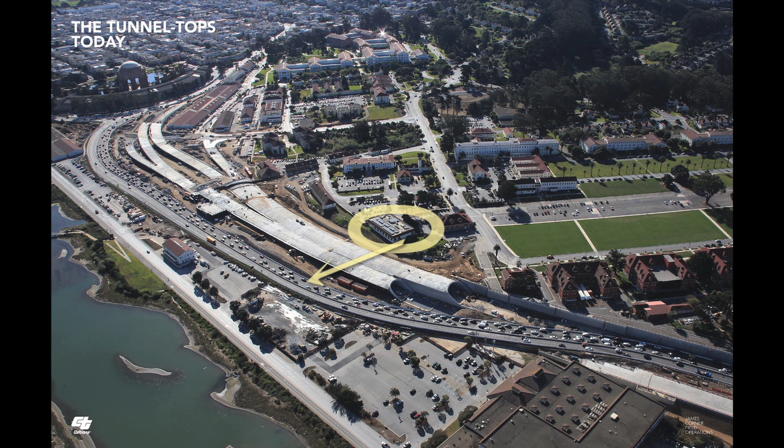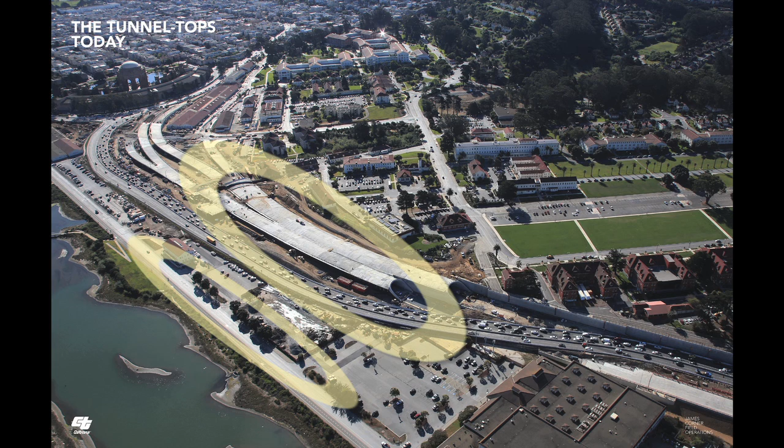This is the project, as you know, the tunnels are being built. This is the main parade and the main post. The building we're in right now is here, with these windows looking out across the tunnel tops to the bay, across the marsh. Our project is about building all of this out as one new elevated park with great views, and a new lower level park tied to the Crissy Field Center with Mason Street as a lower level learning landscape.

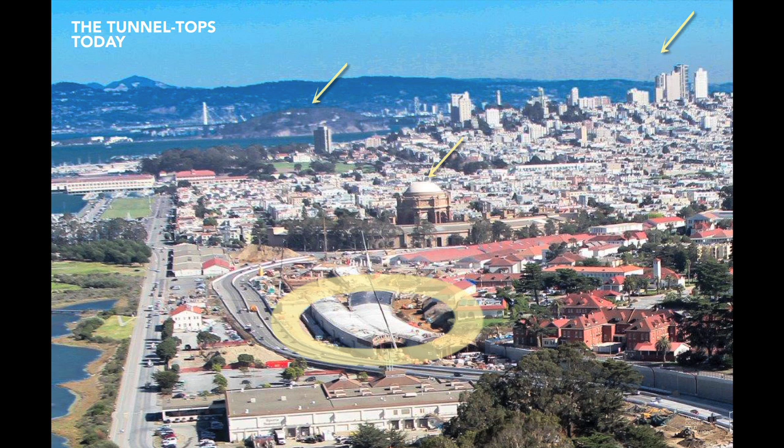This is another view showing those tunnels with the main post, and we will be building out over those tunnels. You can begin to imagine the sort of views you'll get standing 35 feet above grade in this location - clear views to the city, the Palace of Fine Arts, Alcatraz, the Bay, the Golden Gate Bridge, and all the way back into the Presidio, views which we haven't hitherto had.

You could say this is just another park project, and there are lots of parks around the country being designed and built, but I actually think this is a very significant national, if not international, project, simply because of its location. When you get out onto the tunnel tops, this is really the center of San Francisco's psyche, if you will. You're in the context of the bay, you'll see the city skyline, you'll look back into all of the Presidio land, across the marsh and across the field to the Golden Gate Bridge, out to the Pacific Ocean, across to the bay and Marin and Angel Island and Alcatraz. So anybody who understands San Francisco's geographical psyche, its mental map of itself, this is the location to come.

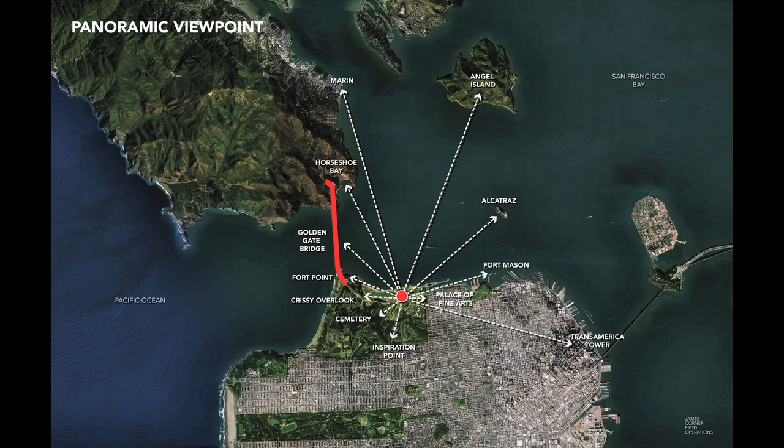I think it will be hugely significant and deserving of the status of a national park. When you step out onto the tunnel tops, you'll have an amazing experience - a very simple but very powerful, visceral experience of being out in the space of the sky, the space of the bay, enjoying all of these views. And of course this is a place not only of great experience and geographical reflection, but also historical reflection, honoring all of the history and the service that has been borne in this place. We've spoken a lot in previous meetings, as well as today with Greg's talk, about the importance of natural systems, natural resources, ecology, and the environment.

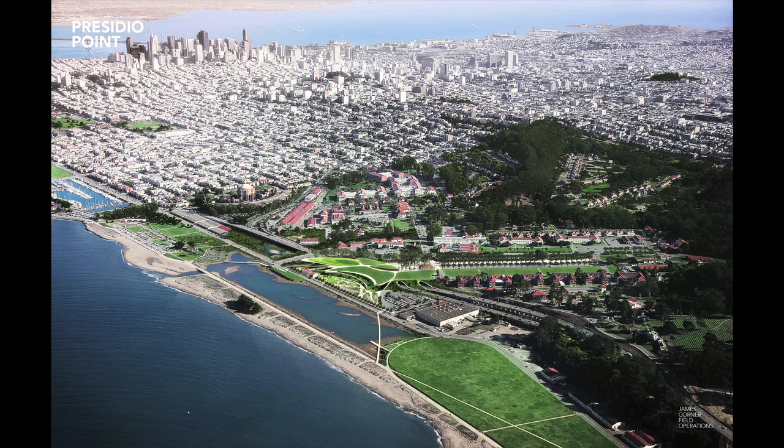Last year, when we won the design competition to move ahead, you can see in this image the idea of Presidio Point - a new landscape over the tunnel tops, taking in these views and enjoying this context. This was the site plan at that time, with a series of new viewing promontories, viewing overlooks, and a variety of public spaces. Over the past few months - January, February, March, all the way through May - we've been engaged in a significant amount of public outreach and public participation.

As a result of that, we developed three alternative variations on a theme. These different variations offered different ideas to do with landscape character, either wilder character or more manicured character, to do with programming and use, from very low intensity uses to higher intensity uses, to different types of landscape look and feel, and the accordance of priority to different moves.

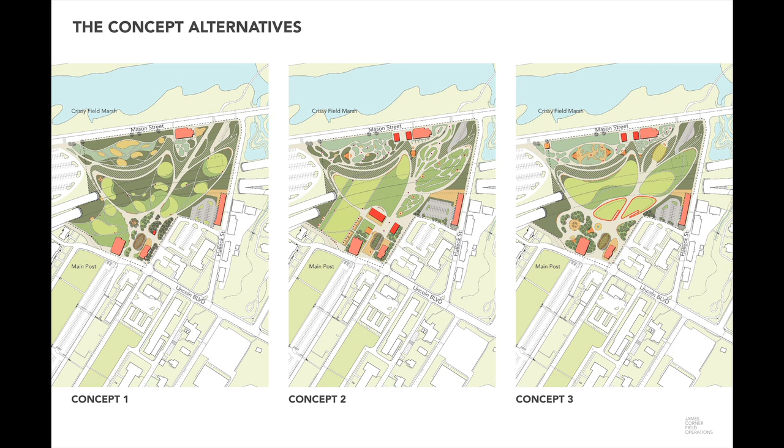These have been on exhibit in the design lab and circulated around the city for several weeks, and we've received an awful lot of input on all three variations, and that's allowed us to get to the point that we are at today. And doubtless this design too will continue to evolve and become richer as the process ensues.

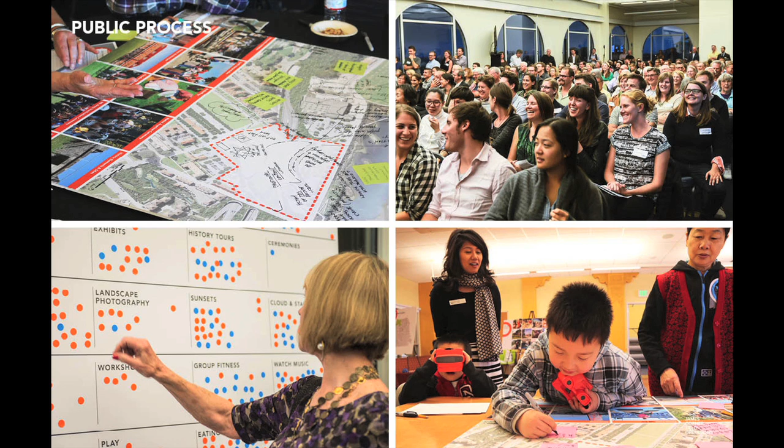I think all of the public outreach we've received have just reiterated the significance and the value of these same goals: honor the significance of the Presidio, offer a magnificent experience of the Golden Gate and the Bay, be welcoming to all, integrate the natural landscape of Crissy Field and the cultural landscape of the main post, create the best place to begin your Presidio experience, and provide exceptional environmental learning opportunities.

I think we would add that we've heard three other things quite loud and clear. Number one, keep it simple, open, and flexible. Celebrate the views and the authenticity of this place, and avoid overbuilding, clutter, and too much stuff.

So here is the concept design as it stands today. And before I delve into it, I want to show you the same aerial photograph today. So here you are actually looking at the parade ground, the building that we're in today with this window here, the tunnel tops, Doyle Drive, the Crissy Field Center, and the marsh.

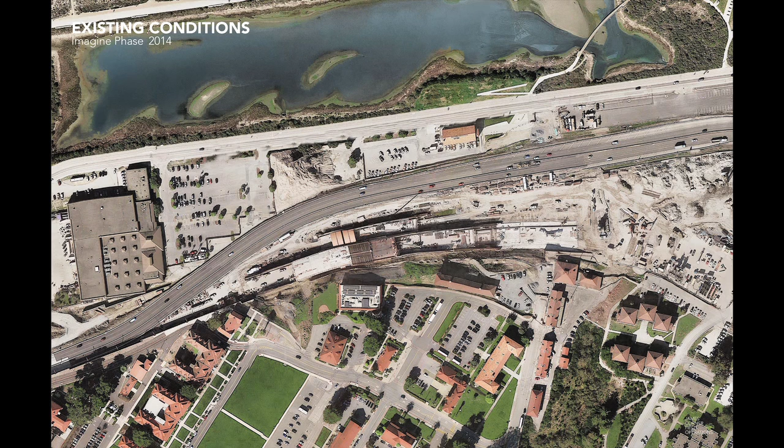And this is the build-out of that park. So this is a hugely transformative project. And when you add into that image what's happening here too, with the Tennessee Hollow project and the Quartermaster's Reach—look at that—so all of this new marshland and creekland tying into the marsh alongside the new Presidio Parklands. This is a hugely significant transformation.

And then what we're looking at here are basically a number of zones through the park. At the beginning, in this more central zone, we have the transit center here, the existing stand of Monterey cypress trees, which we're turning into a new centerpiece as part of a new public space here, removing the vehicular street and the parking. So this now becomes a public piazza, if you will.

We call it the Zócalo, which is a Spanish word for the center of a community. The existing trees become the sort of centerpiece. This building is being renovated as part of a new visitor center. The idea of this is that this is the place where people arrive, are oriented, and gather and assemble.

We're proposing in this scheme the retention of this building, and you'll see some options which have to do with either its removal or its rebuilding. But in this scheme, you see what it would be like if we actually retained this building with the visitor center and the transit center and made something of the central Zócalo.

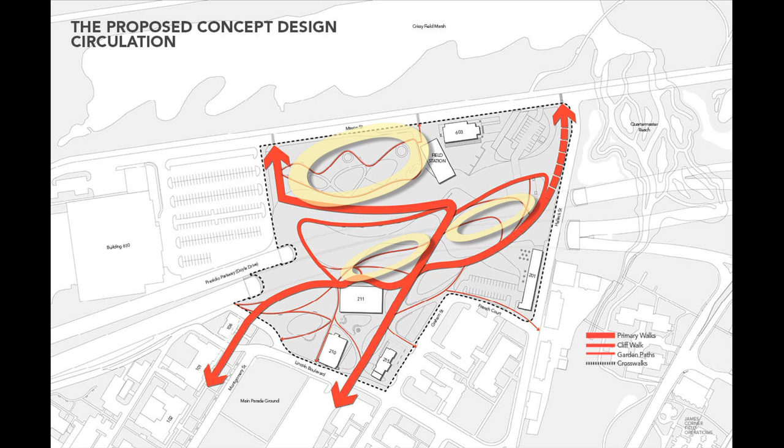And then we still have the cliff walk, which is the walk along the top of the bluff, connecting all of the various overlooks, and a series of tertiary paths. These are quite narrow paths that just meander through the various gardens in this landscape.

And what we have then are a series of different types of landscape. In this color, you see the garden plantings, which would be a variety of succulents and grasses. In lime, you see the lawn areas. This one is actually scooped out of a hill form in an effort to create a wind-protected hollow.

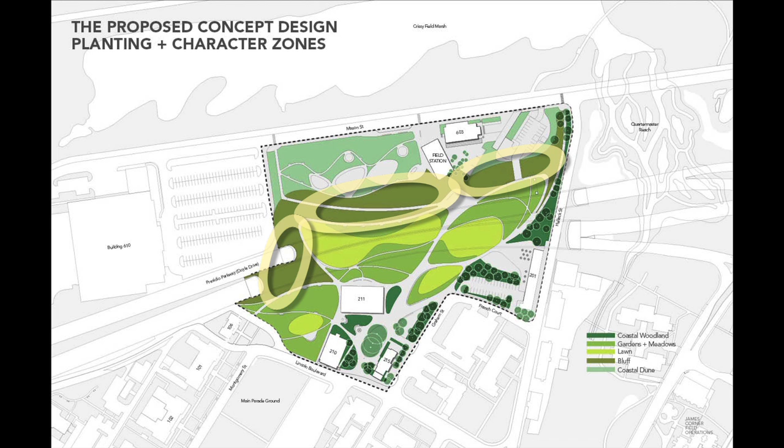Which is oriented towards Alcatraz and the view towards Alcatraz. There's another wind-protected space here, which is looking to the Golden Gate Bridge. And then this is coastal bluff planting, a large-scale restoration project to bring a coastal bluff landscape to the escarpment. This lower level has a series of coastal dune landscapes.

So you see the upper level landscapes, the upper level gardens will be colorful and textural and varied and have very interesting and stimulating horticultural themes. The coastal bluff will have many of the characteristics of the coastal bluff landscape around the Presidio. Some coastal woodland down in the lower landscape, but mostly coastal dunes.

Drawing across that natural feeling from the marsh and the bay. This is what we call the concept design, but then we have actually a sort of catalog of components that we're considering as potential additions.

And these are things that in the next few weeks and months we need to study further and explore, and also run through you as part of the public process about what things resonate and what things maybe don't resonate so much.

In this sort of catalog of additional elements, we have significant new furnishing around the Zocalo, a new meeting and gathering space, a new building to replace this building, increased seating and gathering spaces in the gardens and around the lawn area, various modifications to the overlooks that dramatize them, especially the western overlook with the cantilevered walk.

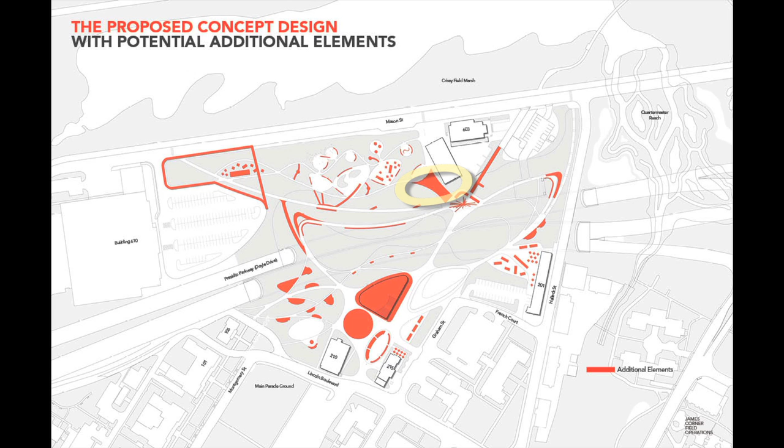A number of additional stairs and ramps and ways to get down to the lower landscape level, including an amphitheater here, or actually less an amphitheater, more a series of seating terraces that bring you down from the central overlook, and a variety of other amenities.

And that produces this version of the plan. If this was to be the full build-out with that panoply of components, this is the plan that shows the concept plan with all of the potential additional elements added.

This is a view of this place today. The main post is here. This is the parade ground in Crissy Field, Crissy Marsh, and the site that we're looking at. And this is it tomorrow,

Including the new work at Quartermaster's Reach. So today, a lot of concrete, a lot of noise from vehicles, a lot of disconnection. And tomorrow, a new democratic platform floating out into the space of the bay, significantly greener and significantly more interconnected with the adjacent resources of the park.

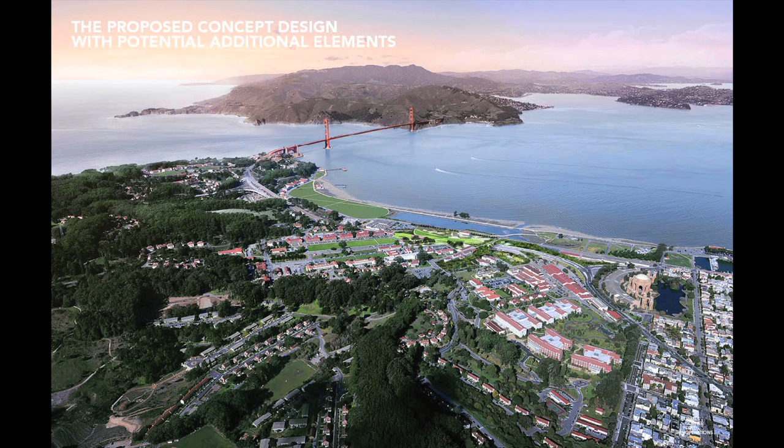This is a view of the site today, and then the project tomorrow. The new visitor center, the shaped cliff walk with the new bluff face, and the lower level learning landscape, an expanded Crissy Field Center.

So again, from a landscape of fragmentation and a concrete jungle to something that is green and interconnected and park-like.

This is a view today or yesterday. The tunnels are being built here. This is the main parade.

Look at the proximity of this location to the city and the juxtaposition of the density of the city with the generosity of natural resources of the Presidio landscape and the bay, and the landscape tomorrow with the projection out of this new park.

You see the new ramp walk down the face of the bluff that comes all the way to Mason and will connect across to Crissy Marsh on a boardwalk and to Crissy Field. So that is now a contiguous connection for people to walk and stroll and cycle and interconnect.

And another walk down the eastern flank down to Halleck Street, across Mason, onto a boardwalk across the marsh, out to the marina and along the bay.

This is a view of the tunnels today. You're looking to the Golden Gate Bridge and Crissy Field and Crissy Marsh. This is Mason, the Crissy Field Center building. This is the building that we're in today with the main parade. And tomorrow, look at that.

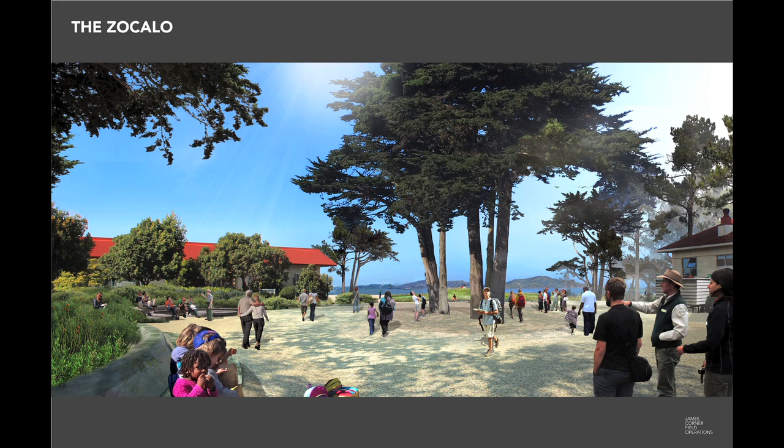If we retain this building and build out the piazza surface with a new surface for people to gather and assemble under the space of the trees, this is what this space will look like. And if we remove that building and replace it with a new building that we've been exploring, this is how the Zocalo could function. This building does a couple of interesting things.

It's simply a glass vessel that is super transparent. You walk into it and it becomes a glass enclosed space at about the size of this room, but without any opaque walls. It will be glass all around with views all around.

The steps you see here are actually seating steps facing south or facing the sun, and you can walk up the steps and come onto the roof where you would have a public garden at that level, elevated views all around. In this view, you're also seeing a lot more furniture around the trees, providing amenities for people to sit and to gather and to assemble.

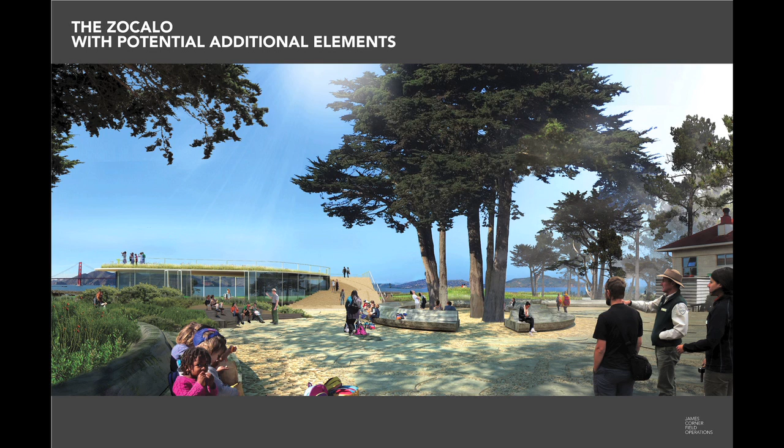This is the place where the rangers and other tour guides gather people together, get them oriented, and put them on their way. This plan shows the idea for that new building.

If you recall the previous scheme, we had two what we call butterfly wings here, which were actually two tilted planes of landscape. Underneath those planes could be two buildings. This is an adaptation of that idea, where here we propose one building with seating steps facing south and looking back along the axis of Anza Esplanade.

And here, instead of a building, we have a scalloped earthwork. This is actually a sort of a hill with a carved out hollow inside that hill to provide a wind-protected lawn for picnicking and for gathering, and that lawn looks east to Alcatraz.

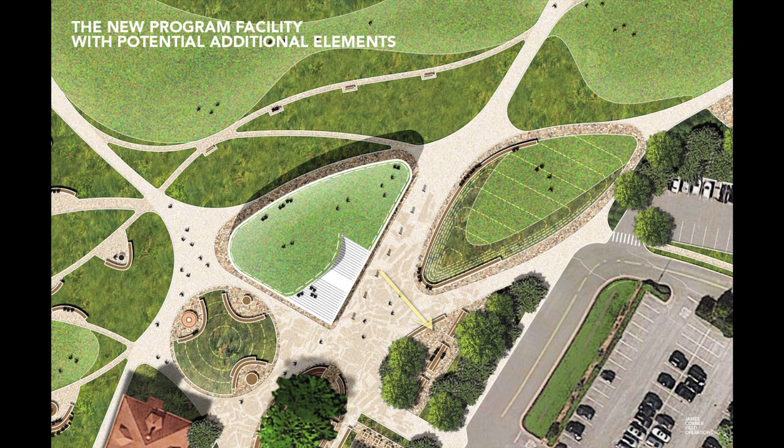You can see here a gathering circle with spaces for seating. There's a couple of campfires built in here, as well as a couple of small platforms for stages and introduction, spaces for picnicking, expanded areas for dining, and a variety of furnishing and pathways through that landscape.

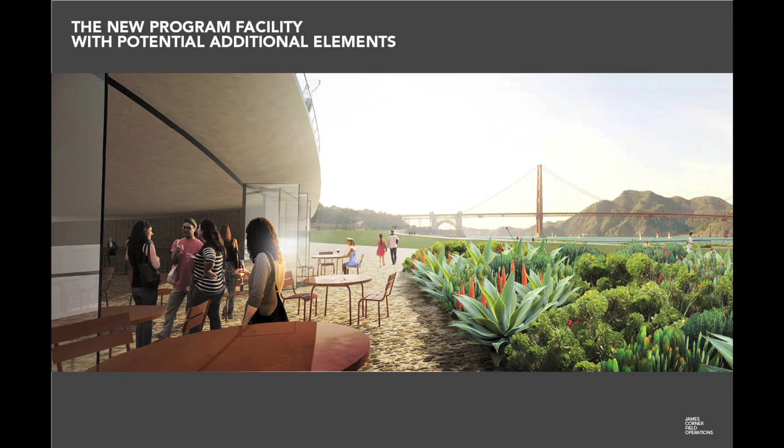On the other side, the glass wall of the building could open and close and be totally permeable in good weather, and open to a garden of succulents and grasses with the new horizon looking out to the bridge and the bay. And from the interior of the building, you would enjoy this sort of panoramic view and vista.

In front of the building, this is the garden line that's drawn across the project so that you're walking through a series of gardens and plantings to move east and west. In the central area are carved out two small lawn areas, a western lawn and a central lawn, and an eastern lawn. This area here is the central overlook.

This is a view of one of those central vistas today on the tunnel tops, looking at the bridge. And this will be the view tomorrow, looking at the bay through a series of gardens and plantings. Those plantings should have horticultural appeal and be delightful all year round.

This is a view of the lawn area on the tunnel tops today, looking out to the bridge. When it's finished as lawn, there's space to put a towel down, let kids run around, have picnics and family gatherings. This is a view looking east to Alcatraz on the tunnel tops.

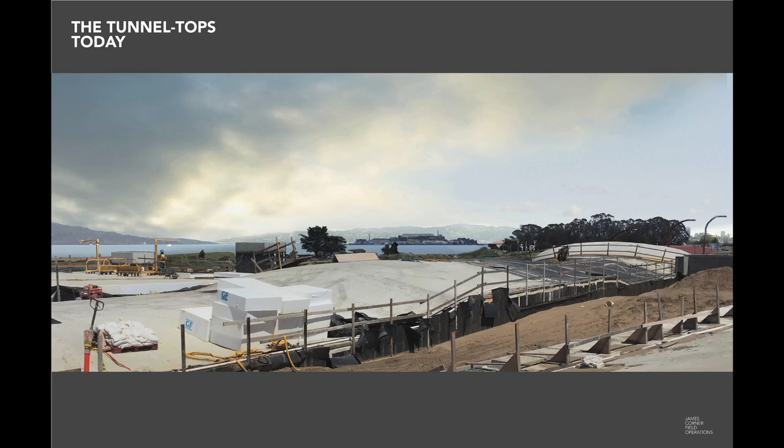This is one of the mouths of the tunnel, where the freeways come in at this location. You're looking out to Alcatraz. This is the view in a large meadow we want to create in the eastern flank, using tall grasses that will catch the breeze and blow in the wind, with a series of small trails that bring you out to the eastern overlook with a very clear view out to Alcatraz.

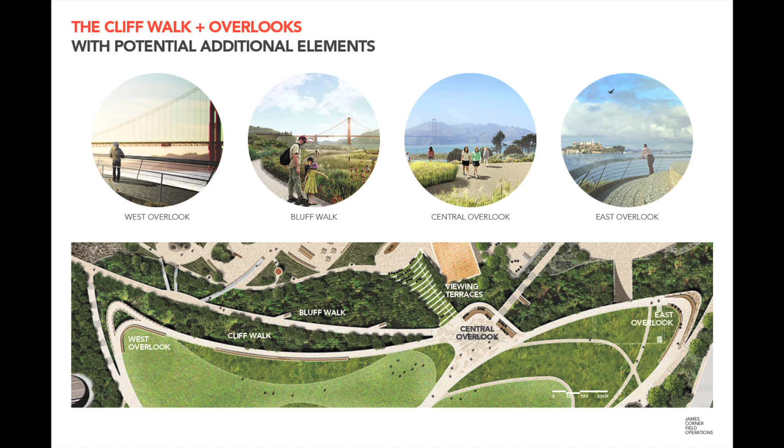This area we call the cliff walk, and this is really a walk where you're coming out to where the Presidio landscape, this upper level Presidio landscape, meets the more wild, rustic landscape of the bay. The bluff landscape meets the plateau here, and we have a walk along the top of that. That walk has a series of components: the western overlook, the central overlook, the eastern overlook, and the bluff walk down the face down to Mason.

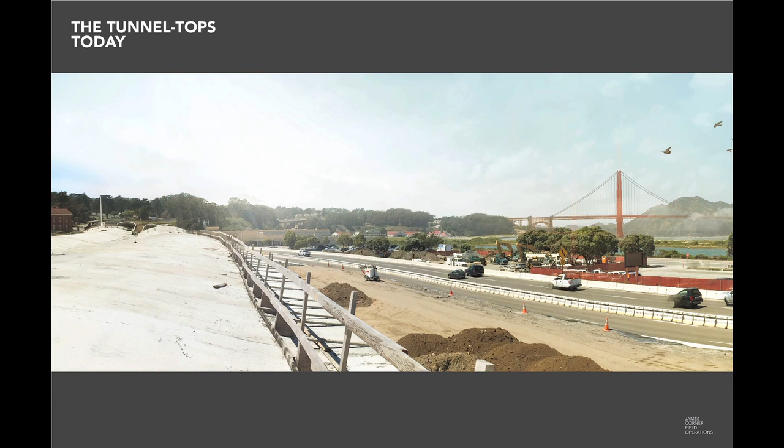This is a view of the cliff walk today. You're on the northernmost edge of the tunnels looking along. This is Doyle Drive. This will be the lower level learning landscape in the future, which is a bit like this. This is the cliff walk with sculpted furnishing to help protect from wind, but also to create a variety of interesting social situations where people can simply sit and absorb the view in a fairly natural setting with a coastal bluff planted landscape in the foreground.

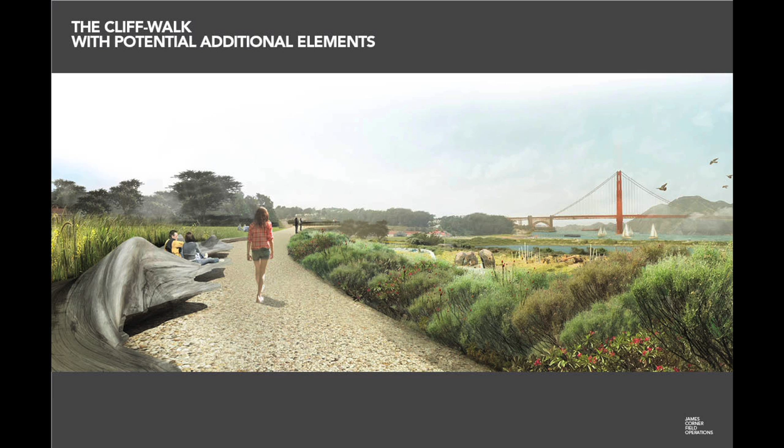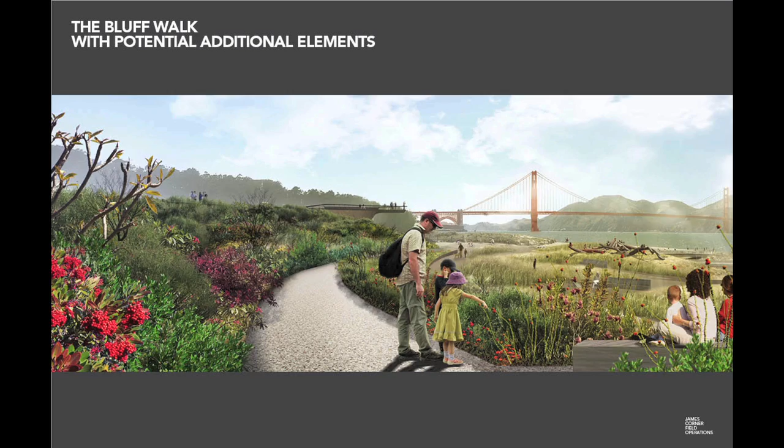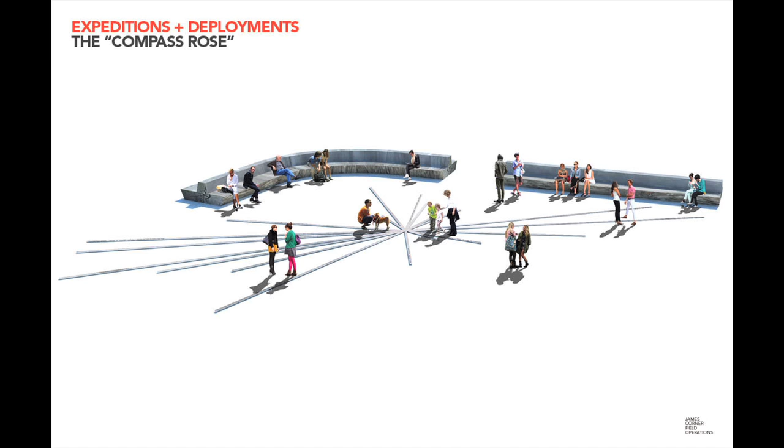We're also exploring another idea that's been a popular suggestion during our outreach effort, which is the idea of a timeline, an interpretive timeline, a series of discrete signage elements that tell the story of the Presidio from pre-settlement all the way through to the current day.

In the lower landscape, we have the lower learning landscape and the expansion of the Crissy Field Center. The learning landscape is really a field of sculpted dunes brought over from the marsh, and in those dunes we carve out a series of spaces that can be used for discovery, exploration, and learning.

and actually move the park west a little bit so that this now becomes a publicly pedestrianized area. The geometry of the walk comes further along Mason, which puts it a lot closer to Crissy Field. We're working with the Crissy Field Refresh Project and the National Park Service for a potential boardwalk across the marsh to continue the geometry of that line all the way to the field, and have a large picnic area

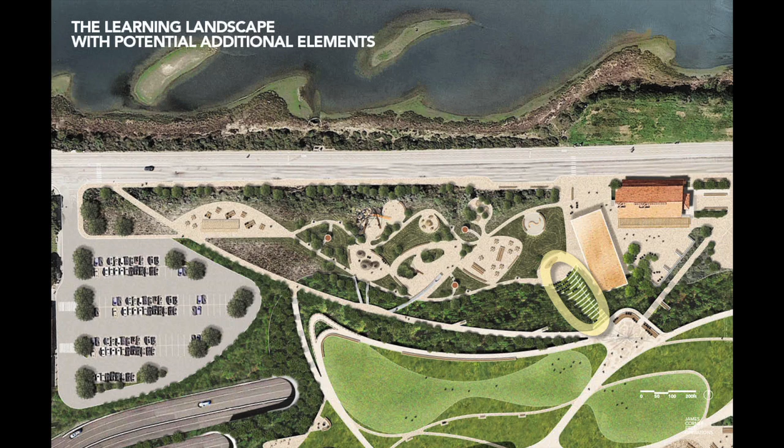The idea of the seating terraces is that it's really a place where people can sit and rest and just take in the view. We want to design this so that it's really embedded in the coastal bluff landscape, so it's not an alien feature, an overly built or overly scaled element, but something that really nestles you in the slope of the bluff and gives you this sort of experience of being in that space.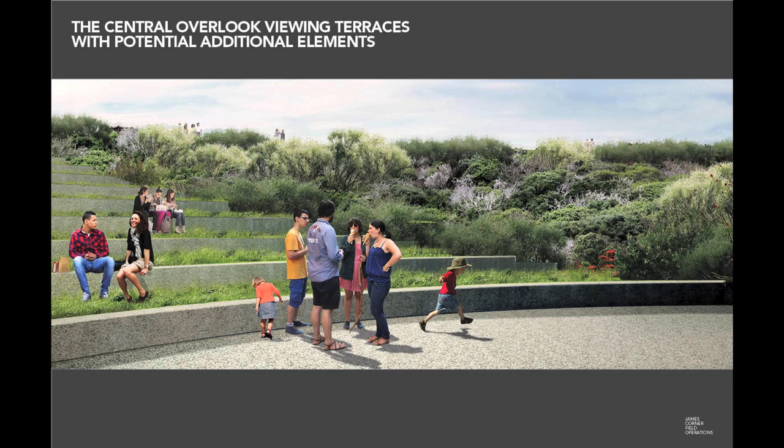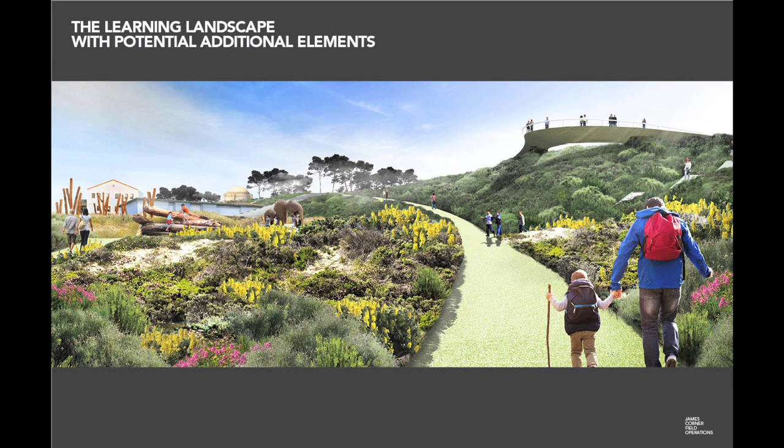The learning landscape offers a variety of rustic settings for children of all ages to come and learn and discover and play. There's sand components, water components, a variety of opportunities for learning about natural ecosystems and historical resources, places to get to work and to manage or steward the land.

And here, we're showing the new building proposal as an addition to the Crissy Field Center. Importantly, the front part of this building is understood as a field station, which will be welcoming to all public to come into the field station and to use that as a point of orientation in this lower level.

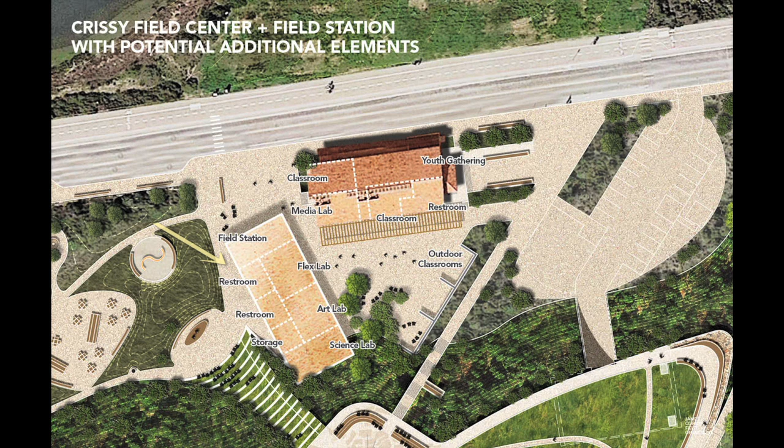All of the public restrooms would be oriented towards the public space, and it allows the Crissy Field Center to have its own internal youth campus with outdoor classrooms, a flexible lab, an art lab, and a science lab, a sort of internalized learning campus. The architecture for that would be something light and airy and rustic, primarily using wood and steel and glass.

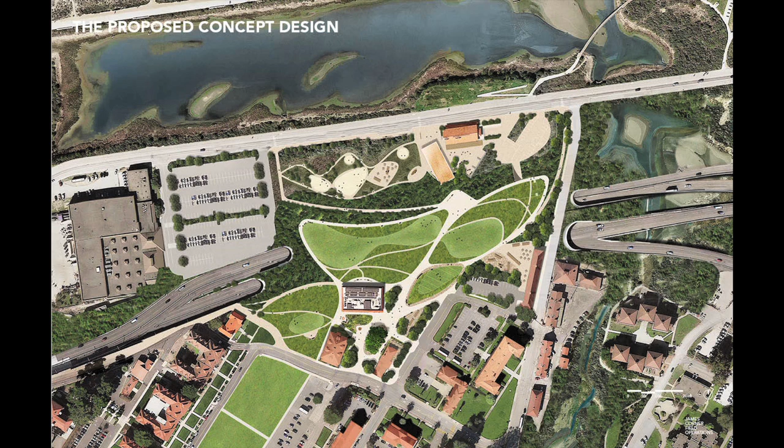So that summarizes where we are. This is the concept design in its base format, and this is the concept design with its various additions. Over the next few weeks, we're going to be exploring the merits and pitfalls of each of those additions in a sort of rational process. This is the site as we see it.

I feel that this presentation talks about a lot of details, and I think it's really important to end on the note of just how significant a transformation this is. I think you should all congratulate yourselves on the vision that was initiated when you foresaw that this would be a hugely transformative project. It's significant in terms of connectivity.

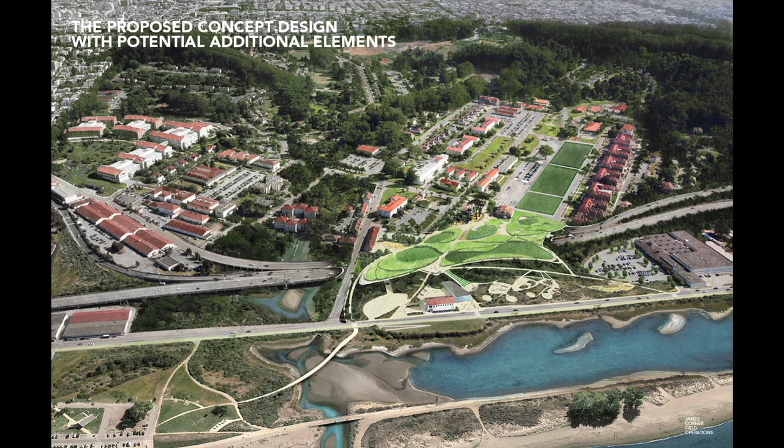Look now at how all of the various parklands are interconnected for pedestrians, cyclists, and walkers. It's important from the point of view of being a new sort of democratic, symbolic, central platform for viewing the city in the context of the bay. And that's an extraordinary national park experience that no other national park can boast, having this exposure to natural resources, cultural and historical resources, but in such a civic and urban adjacency is an extraordinary asset.

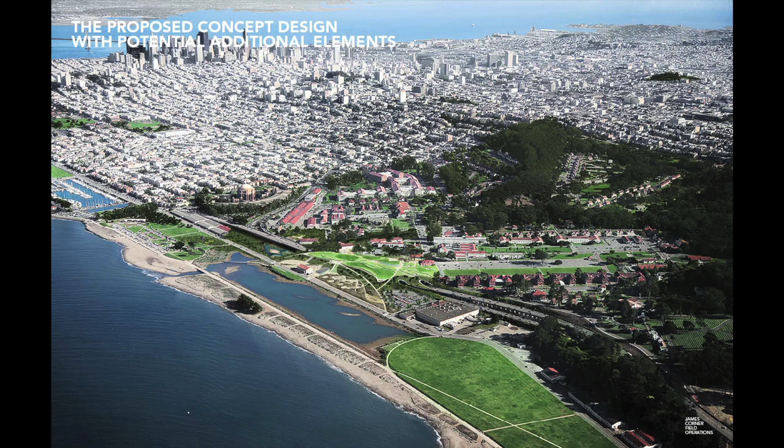And here, again, you see the significance of connectivity and the drama of this landscape. I do believe that we've kept it relatively open and simple and flexible in response to a lot of feedback that we've heard that it should be just that. At the end of the day, I think this is the beginning of a very, very significant transformation of this larger landscape. Thank you very much for your patience and attention.